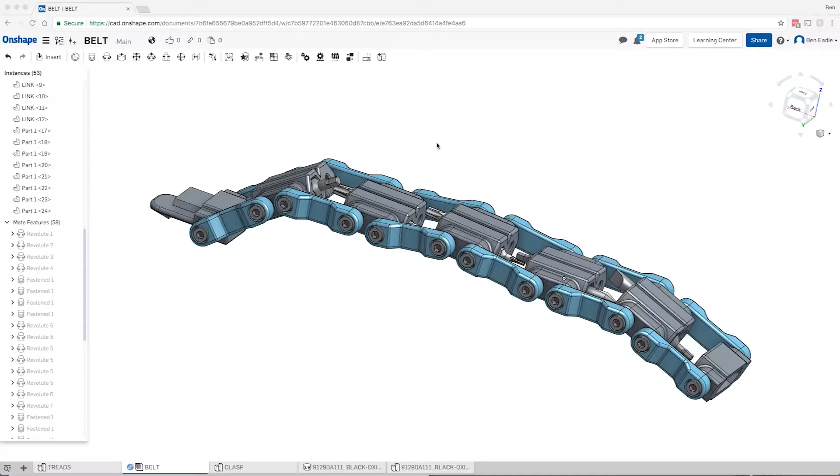So now we got the assembly and everything. There's going to be a few questions, especially for those of you that are the 3D printer types. Let's get into one thing. One is, how do I get the file that I can use to 3D print? Before we get into that, I'm going to show some cute little tricks here.

If you right click on a part body down here, you can come in and change its properties, edit its appearance, and assign material. Well, edit the appearance. Let's make this like a black PLA color. So we'll go like that.

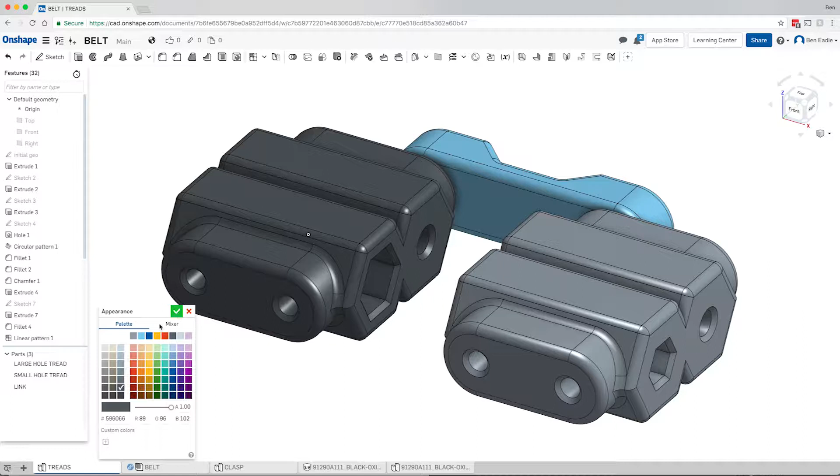And you don't have to be stuck at selecting only one to give it a color. You can come in and edit the appearance for two of the parts, and you can say, hey, I want them to be like this. And now everything, when you come into the belt, will look a little more realistic as far as what you would have if you built it.

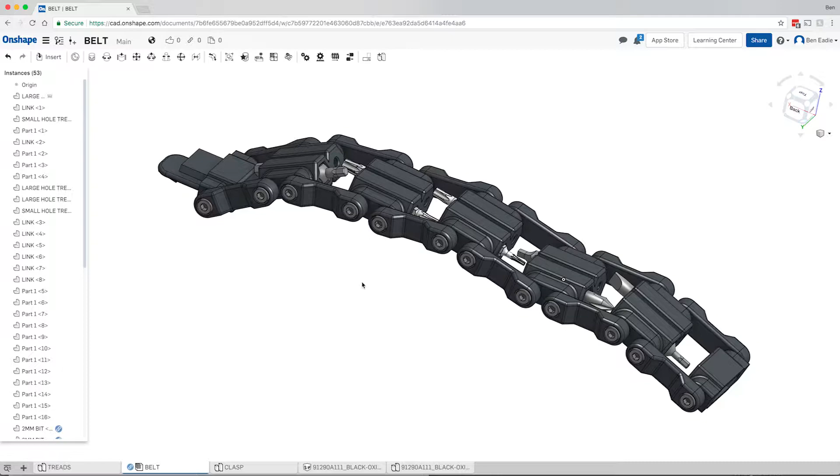And you got something that's all kind of floppy and movable here. You just grab that and you can see I can move these pieces around as if it were free floating. It's pretty interesting when you play with this. The physical dynamics aren't in there. So imagine it just being in zero gravity and trying to sort things out, but you only have one way to grab onto it. So this is why moving some of these parts around can be kind of silly, and that's why you have this sort of strange look to the whole thing.

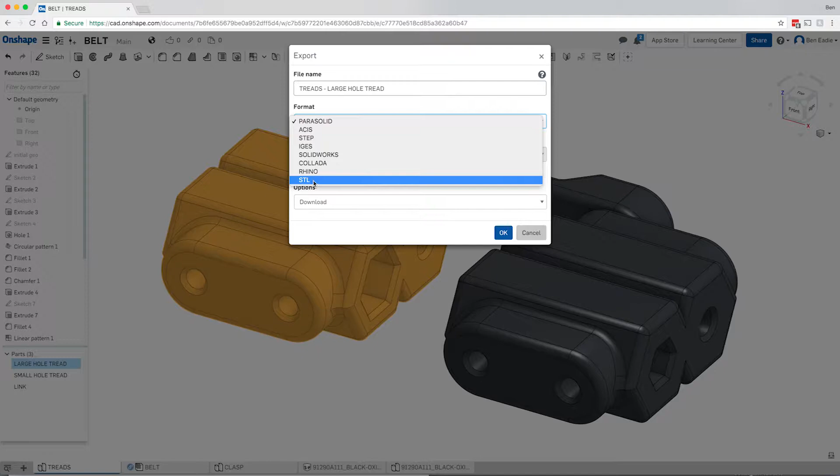The big reason why I'm making this a little extra video. So we've got these three parts, sort of the three main parts for the belt. You can come onto a body right here. You can click on it. You can right click and you can choose export. Now you can export as a parasolid or several different kinds of 3D files, but you'll notice that STL is here. Binary format seems to work well for me.

Units, this one I prefer to have millimeters because that's what my system is generally on. And resolution, most of the stuff that I've done is fairly small, so we don't really have that many triangles. So I always like to make it a nice fine resolution so we make it nice and clean.

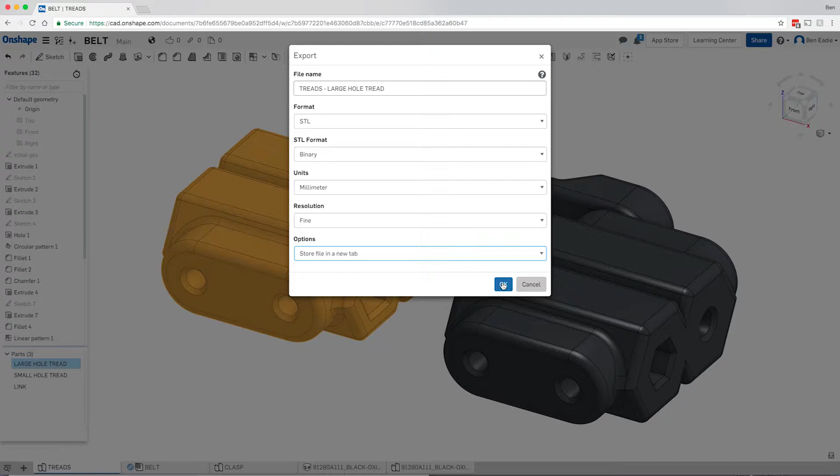Now, one of the last things you can do here is you can click on here and you can download it. You can download and store the file in a new tab, or just store the file in a new tab. So I'm going to store the file in a new tab. I'd recommend you guys just do download. I'm doing the store in a new tab for a reason here. Now you can see that the file has not been downloaded, it's been put into a new tab. But when you right click on this tab, now you can download it. So you don't have to recreate it each and every time.

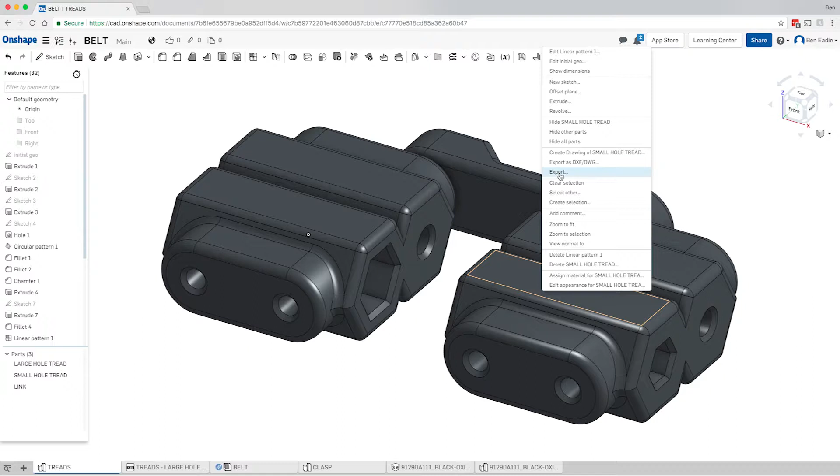So we've got the treads, the large hole one. We'll just repeat that same thing, as you can come in here and do an export right in this feature tree. But we can also come in here and select on the part. And again, you can export it here. And it'll keep all the settings that you had before. And I don't want to store it in a tab. We'll just say download. We'll go OK.

One last time for this link. We'll say OK. And let's not forget the clasp. The clasp had a couple of parts in here. Now, you'll notice that when I changed the color back in here, because this is a derived part, the derived part is going to pull the color from over here.

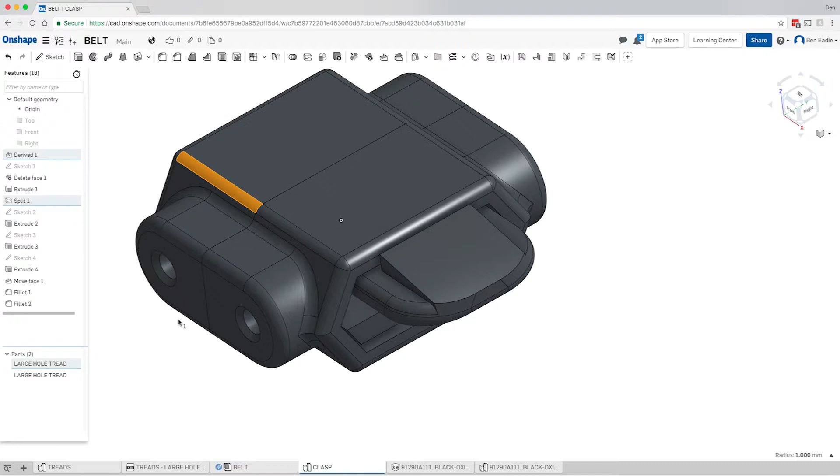Most of the changes that I make in here are going to come over to this side. If I decide to change the fillets of this edge, it's going to follow through on this. How about I just show you how that's done? So let's come into treads. Now we use the large hole part, and let's just go to the first fillet that we did.

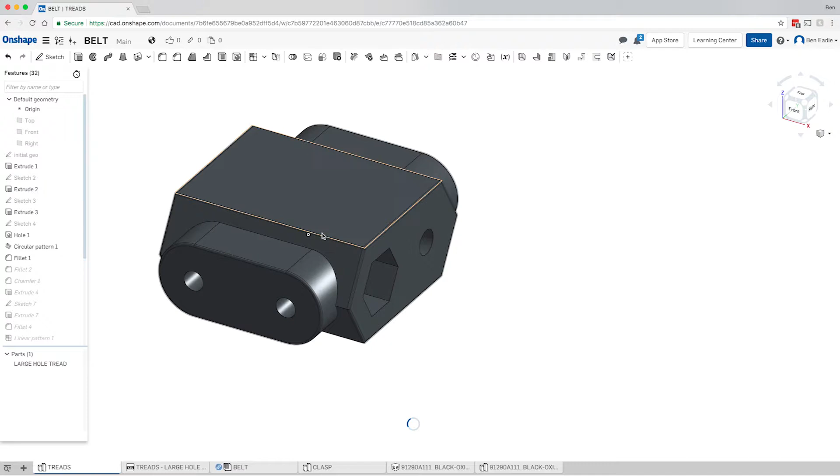We'll make one sort of ugly change here. We'll do 0.25 to make little tiny fillets. And it will look entirely different now. Let's come over to the clasp. Now that's updating, you'll notice that it brings in the new fillet radius that we had before, or that we

just updated. So if we make changes to the bodies on this side, it will make the changes in the derived part, which can be good or bad depending on how you look at things. I think it's good as long as you have it in your head that that's what's happening. Then surprises don't necessarily happen that much.

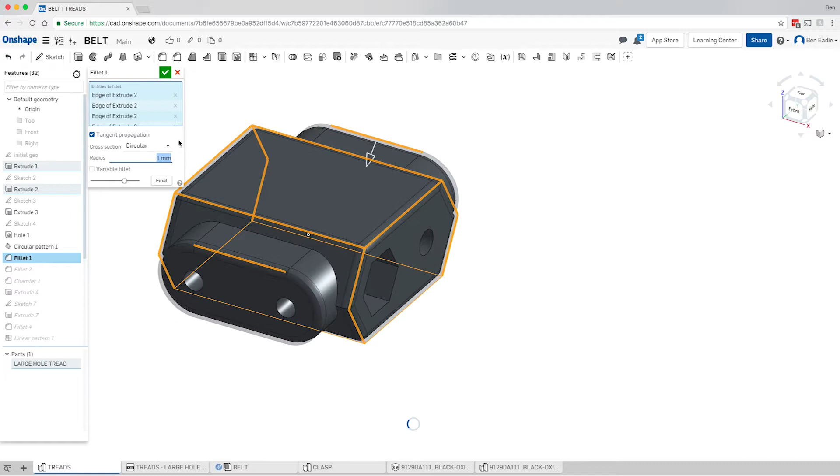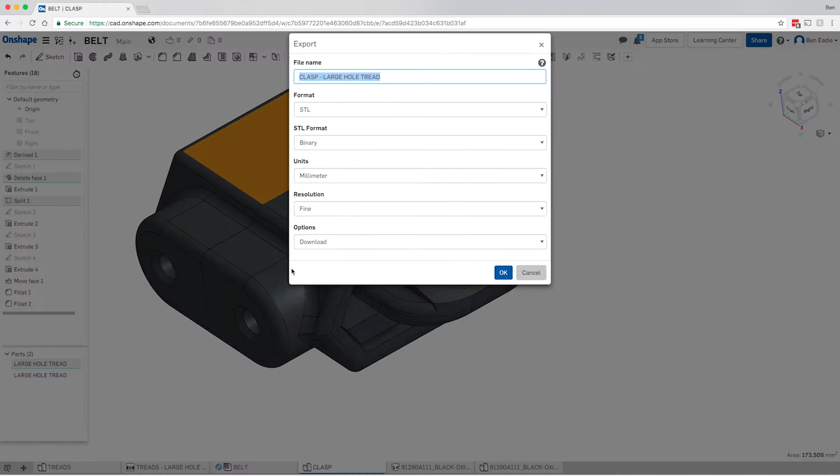There are other ways to get around this sort of thing if you didn't want that to happen, and that would be exporting as a Parasolid file and then re-importing it as a different part, and you'd still have the same geometry, but then it is no longer linked. Let's get back to the original reason why we were here. We're going to export this as an STL.

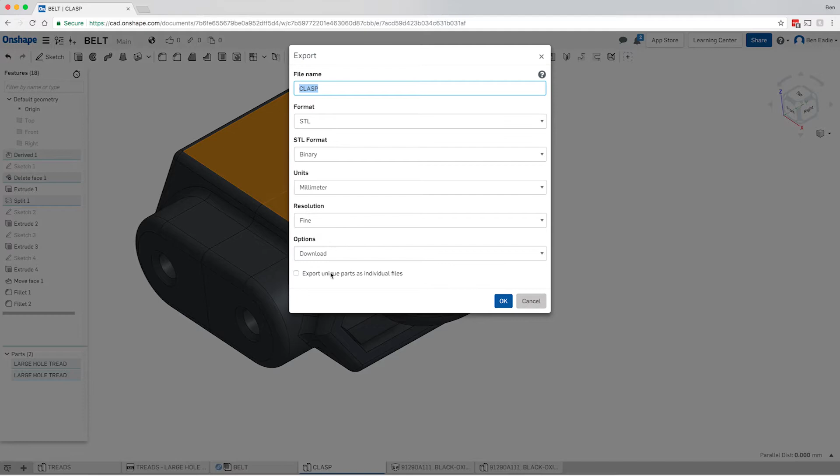Now this is something that I was just about to do. So you can see that this part was selected. Now I didn't deselect it, and now we can see that both these parts are selected, and I right click on this and I say export. You'll notice that it will export both those bodies, and I don't necessarily want that to happen.

So you can double click in this area, or you can hit the spacebar to deselect things. Then you can right click and choose export. And now we got that one part. So it all depends. You can export the entire thing as one STL, but then you have to deal with all the files. And just to finish off, we'll open up Simplify3D.

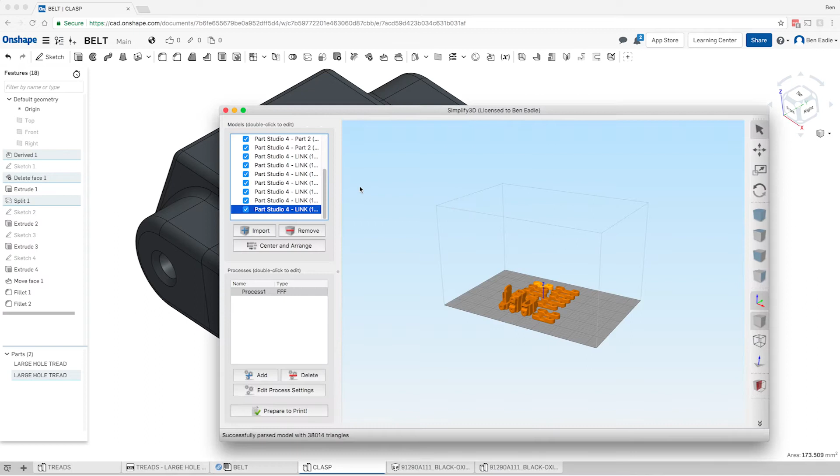And you can see the other parts that I had brought in from before. We're just going to remove everything from the last print that I did. I'm going to import. And we've got these files from downloads that we just brought in. And you can see everything came in just the way you'd expect it to.

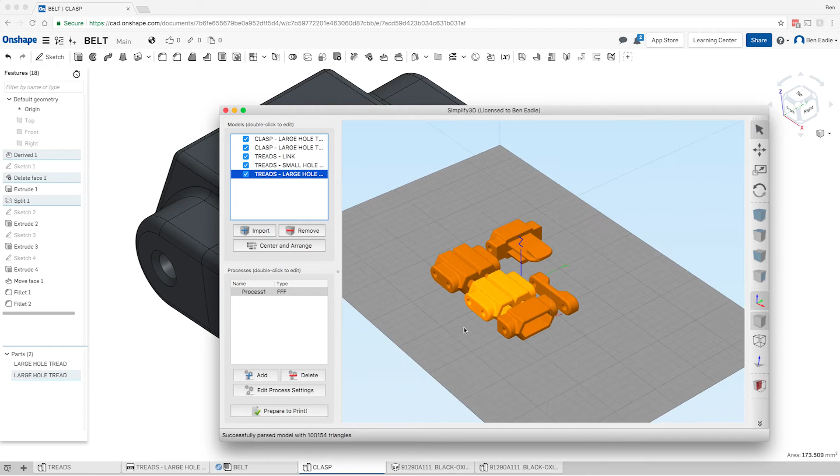Now, I'm not going to go into the tutorials on the orientation of all these parts and how to duplicate them, but you can see that what we've done is we've started from scratch. We didn't have an Onshape account. We created the account. We got a tour of the interface. We learned how to build parts. We learned how to build a quick assembly, and we have an entire finished bracelet and tool.